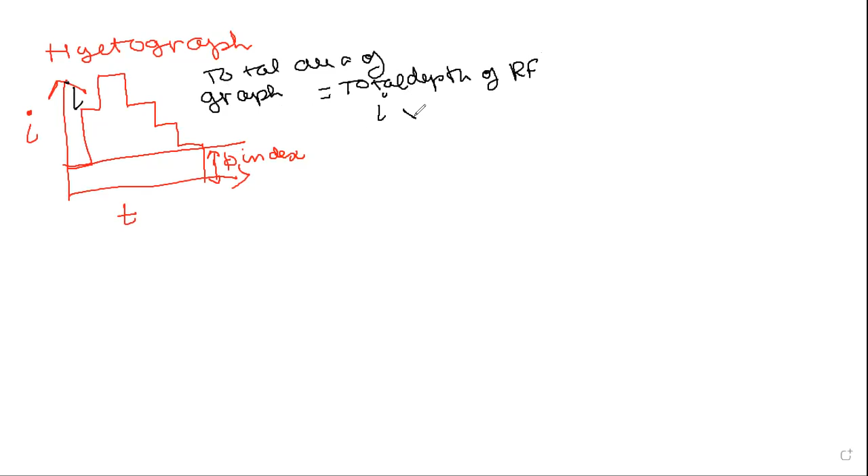In this graph, the total area of the graph gives the total depth of rainfall. The total area of the graph will be equal to the total depth of rainfall. So what does it mean? Area of the graph will be intensity into time, right? We know the unit of intensity is centimeter per hour, and the unit of duration is hour. We cancel, so at last we get centimeter. Based on that, we can calculate the total depth of rainfall.

So in this graph, we were talking about the phi index. The phi index gives the total amount of infiltrated water, the total amount of water that gets into the ground. The values above the phi index give an idea about the total volume of water contributing to surface runoff.

If you shade this region alone, it will give the total surface runoff. Therefore, the shaded area in this graph will give information about the depth of surface runoff. Okay, so in this we have to read about the runoff coefficient.

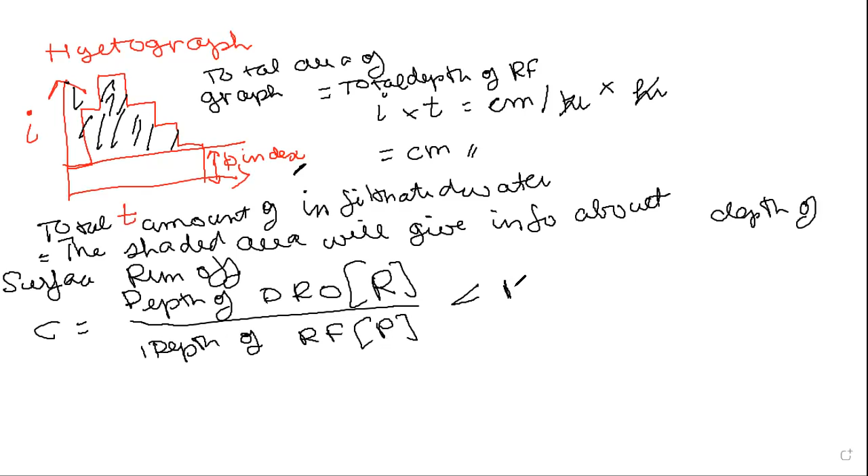So we can calculate discharge of runoff. Q runoff will be equal to C I A. This is the basic formula used for calculating discharge. Here discharge will be in meter cube per second. C has no units. For I, intensity of rainfall is centimeter per hour. For area A,

it is kilometer square. So if you change the formula for calculation purposes, Q is equal to CIA divided by 0.36. This is about the hyetograph. Next, we will be discussing the hydrograph. So what do you mean by hydrograph?

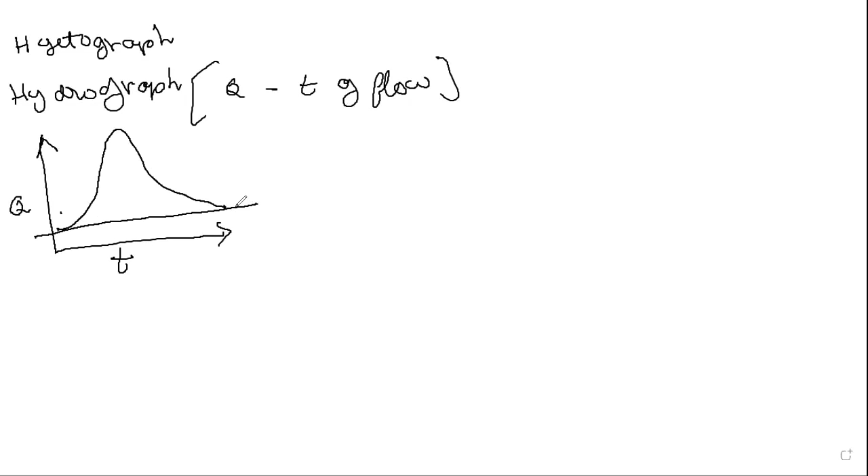It is a graph drawn between discharge versus time of flow. So how will the graph look? Discharge is on the y-axis and time of flow on the x-axis. This line indicates base flow. So it is a hydrograph drawn between discharge and time of flow.

In the hyetograph, the area of the graph gives total depth of rainfall. In this case, the area of the graph will give the volume of the direct runoff, DRO.

In the case of a unit hydrograph, we will be considering runoff depth as 1 centimeter. These are the points to be remembered. So here runoff is equal to half into time base into Q peak divided by area of the catchment.

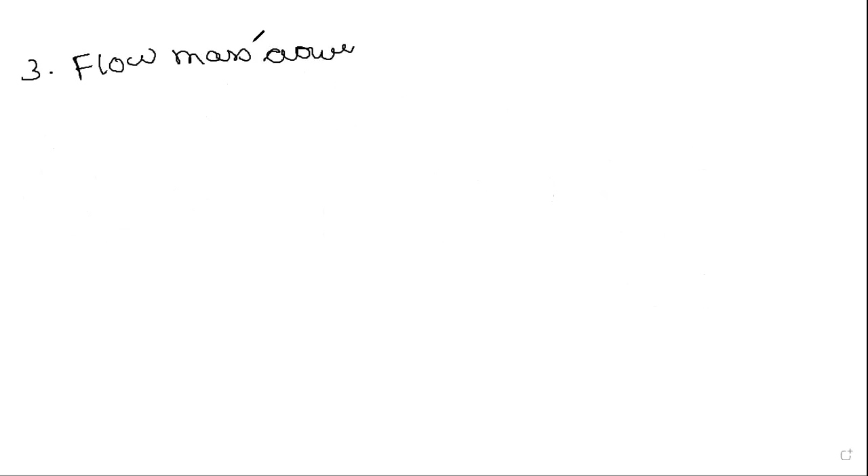The next graph we'll be discussing is the flow mass curve. This curve is also known as the Rippl curve. So how will this graph look?

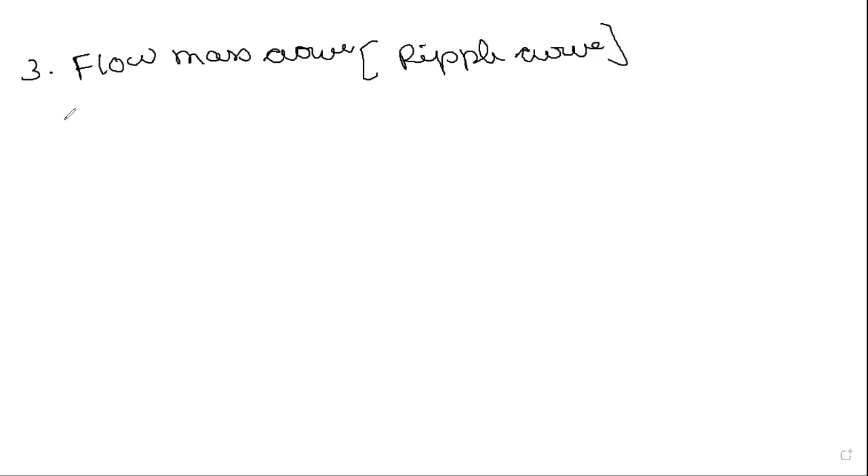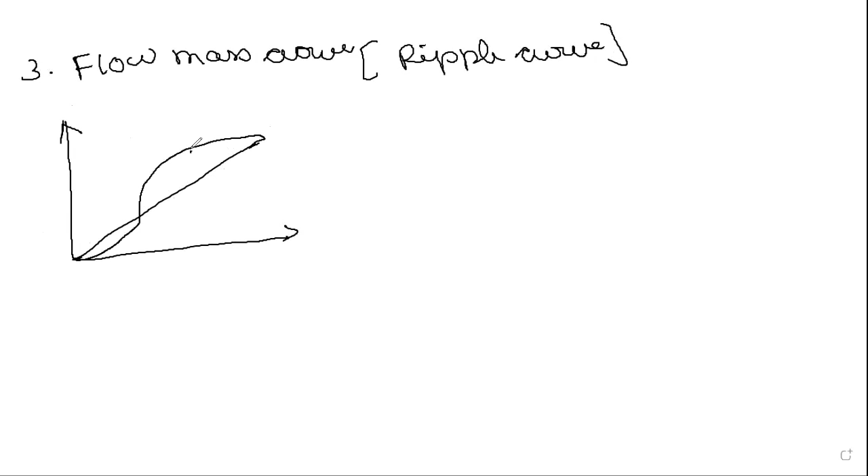Here the graph will be like this; this gap is denoted by y2 and y1. The y-axis denotes cumulative inflow, which is nothing but discharge into time. The x-axis gives information about time of flow.

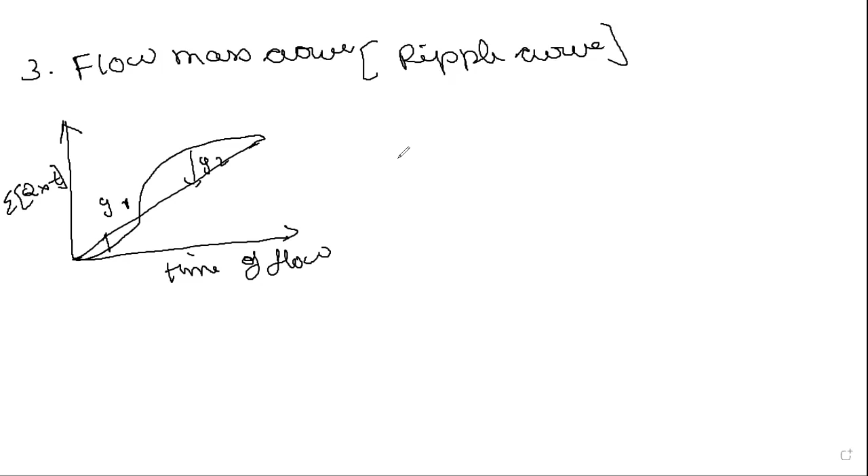So what do y1 and y2 indicate? They indicate the reservoir storage capacity, or live storage capacity of a reservoir. y1 plus y2 is equal to the live storage capacity of the reservoir.

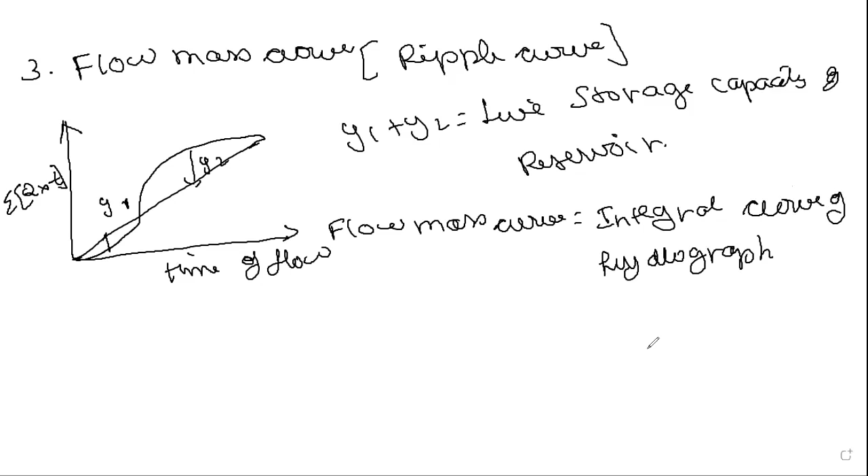Y1 plus Y2 indicates the live storage capacity of the reservoir. Flow mass curve is also known as the integral curve of hydrograph. So mass curve is also known as integral curve of hydrograph. So far we have three curves, three graphs: first is hyetograph, next is hydrograph, next is flow mass curve or Rippl curve. So next thing we will be discussing about

mass curve of rainfall. It is a graph drawn between cumulative depth of rainfall, that is summation P, in the y-axis, and time of rainfall in the x-axis. So this graph will be like this one. From this we can get dy/dx. Here tan theta, which is equal to dy/dx, is nothing but the intensity of the rainfall. This is an example of mass curve of rainfall.

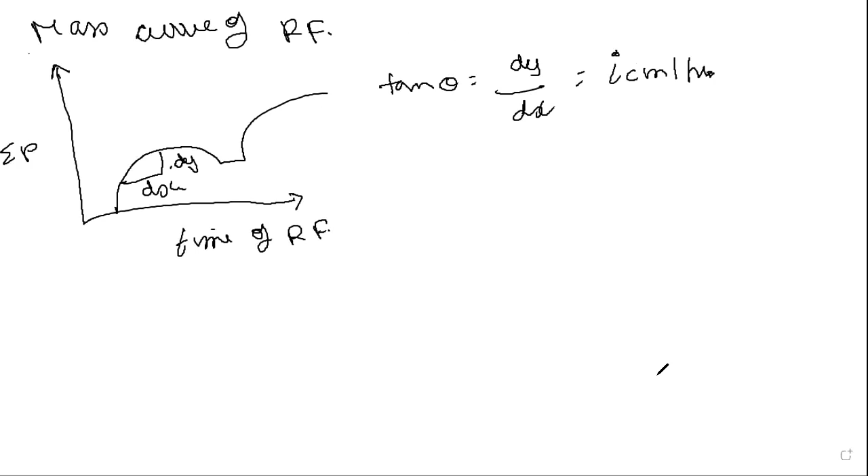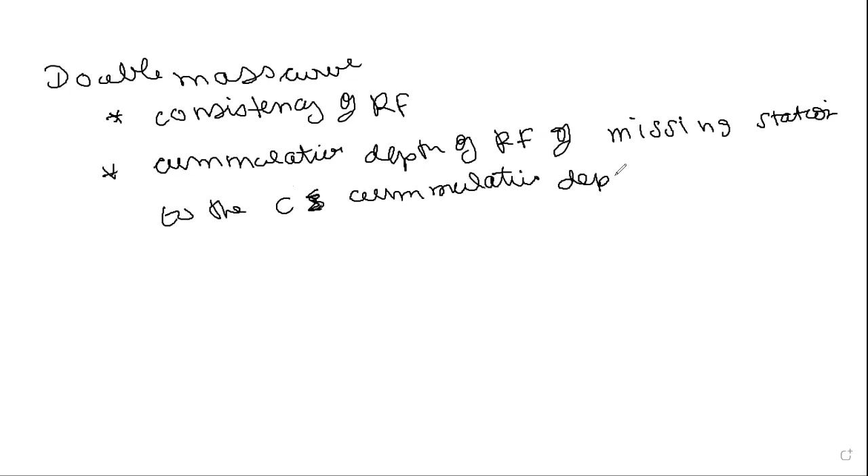Next thing we will be discussing is double mass curve. This is one of the important curves. It's similar to the mass curve, but with the help of this curve we can check two major parameters. One is consistency of rainfall, how consistent the rainfall is. Next one is cumulative depth of rainfall of the missing station to the cumulative depth of rainfall of the surrounding station. These are the two things we can determine with the help of the double mass curve.

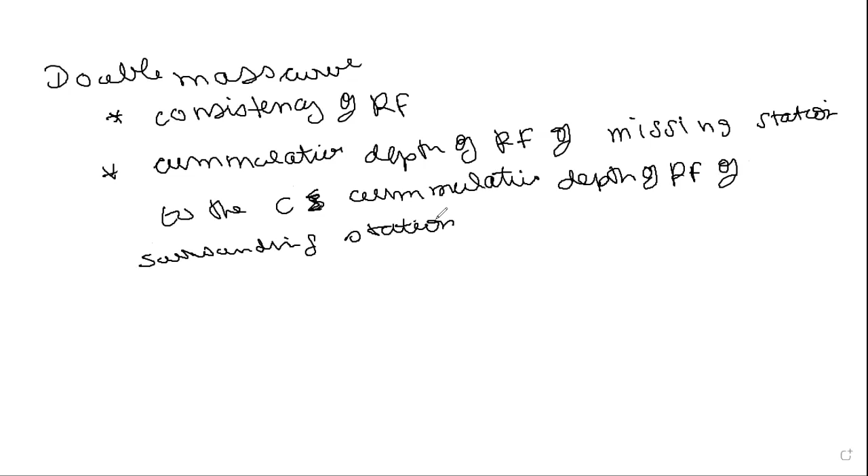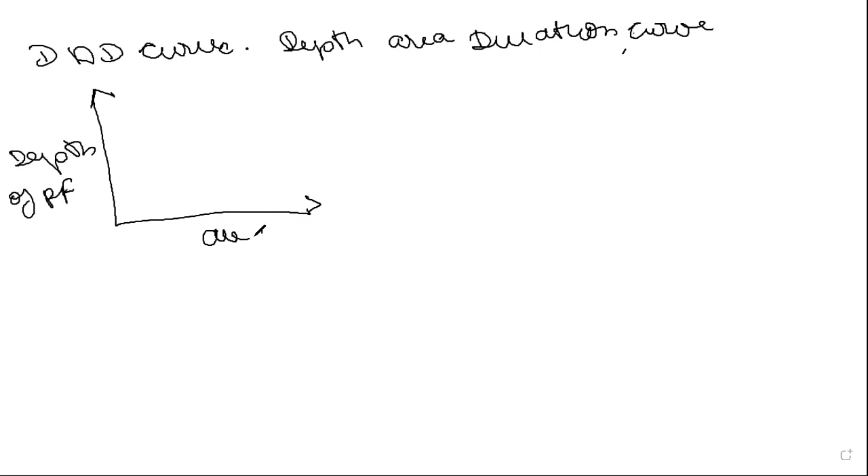Next, after double mass curve, we will be discussing the DAD curve. DAD curve is also known as depth area duration curve. In the DAD curve, depth of rainfall is in the y-axis, area in the x-axis, and duration is the parameter. So it will be like 25 hours, 15 hours, 10 hours. This is the depth area duration curve.

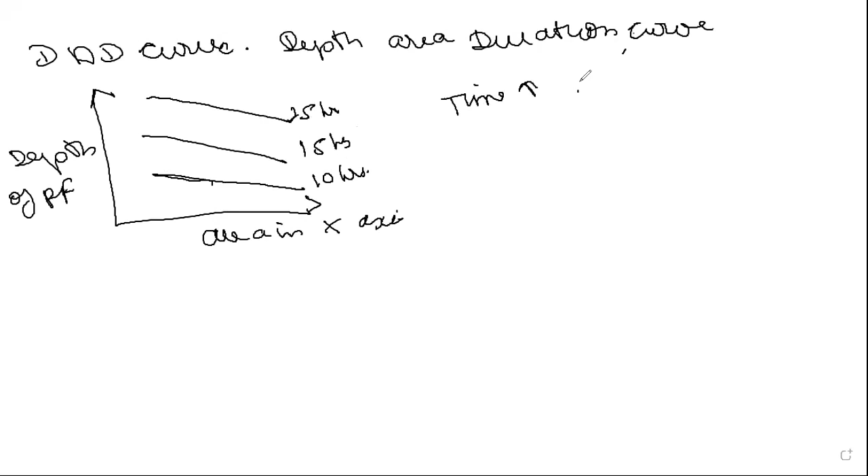With the help of this curve, whenever time increases, we can see that slope also increases. So time is directly proportional to slope. We can consider two scenarios. First, if time is constant, then area increases but depth decreases. Similarly, if area is constant, as depth increases, duration also changes. For example, keeping area constant at this point, if you look at the depth for each and every time, the depth keeps on increasing. So depth is directly proportional to duration. This is the depth area duration curve.

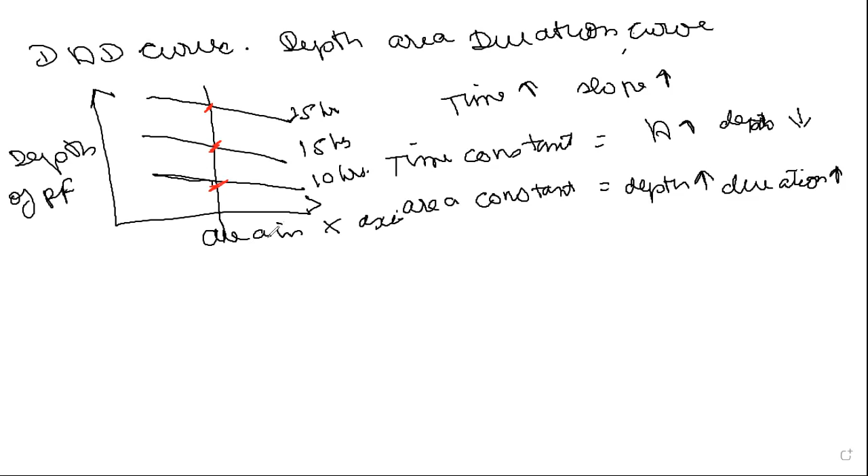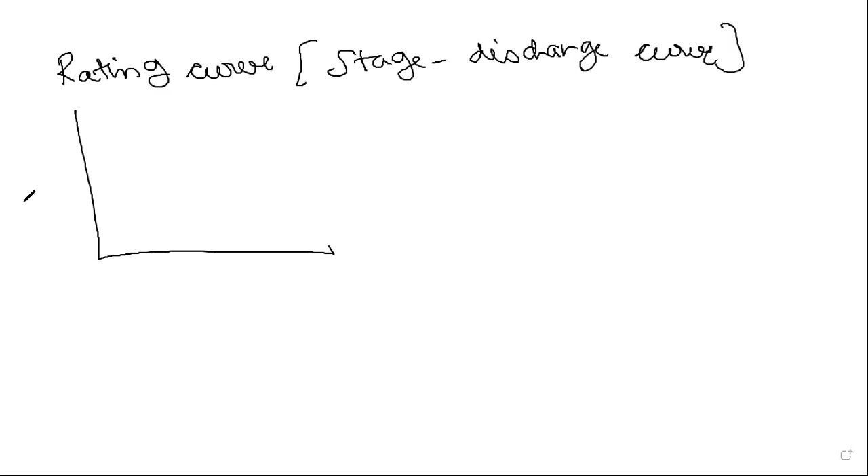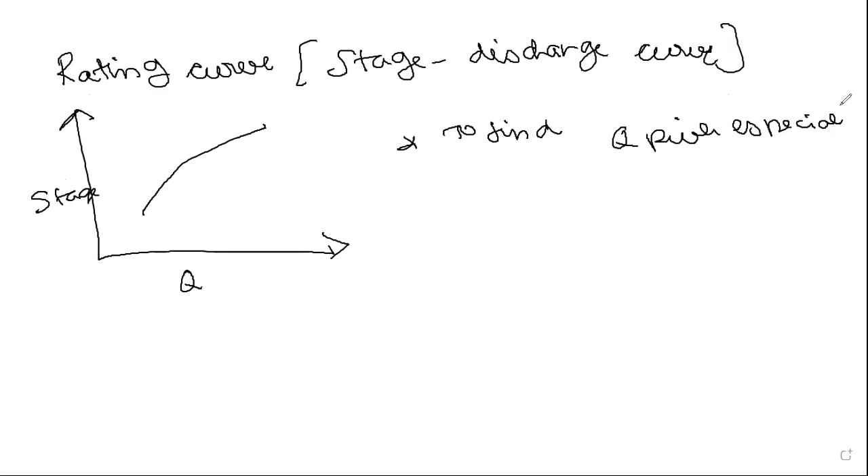Next thing we will be discussing is rating curve. Rating curve is also known as stage discharge curve. It is a graph drawn between stage in the y-axis and discharge in the x-axis. So this graph will be like this. The main purpose of this graph is to find discharge of the river, especially during flood time. It is also used to find depth of water in the river.

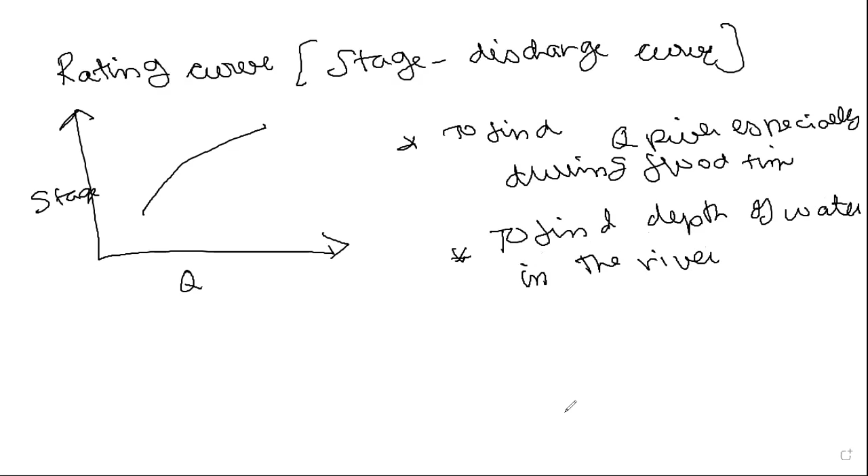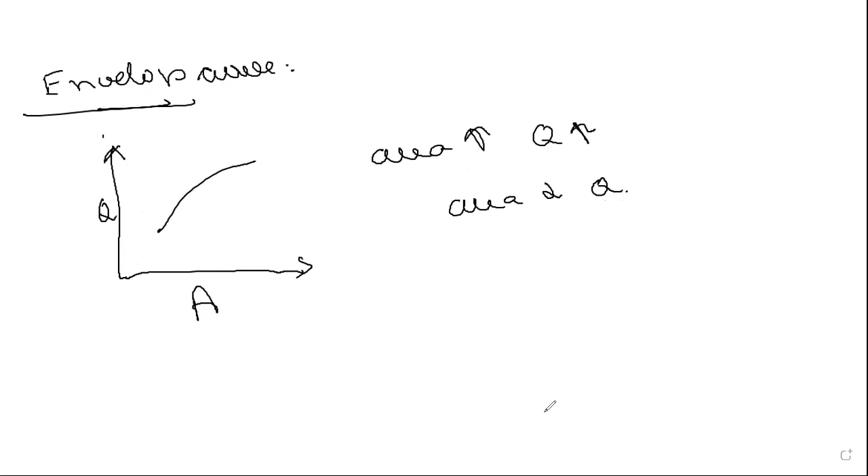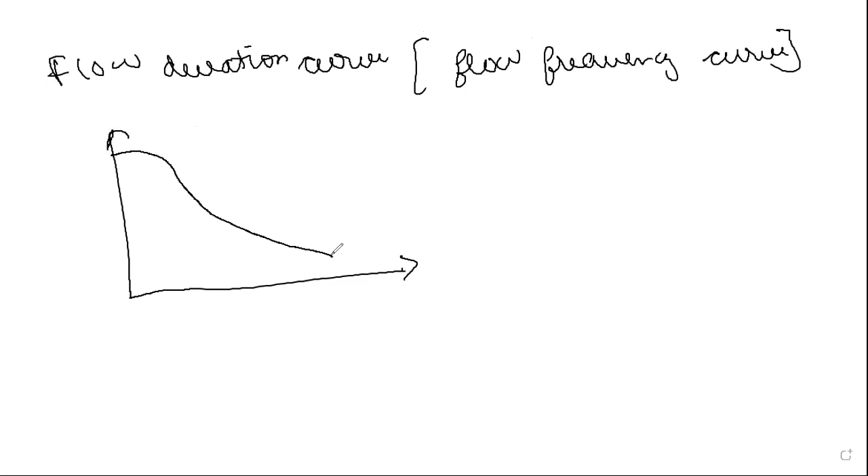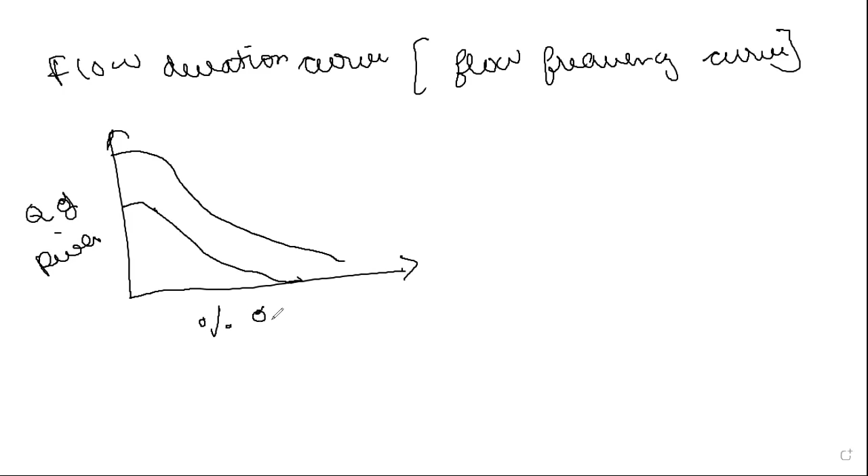Next is the last graph, flow duration curve. Flow duration curve is also known as flow frequency curve. This graph will look like this. In the y-axis we have discharge of the river, and in the x-axis percentage of time. Here it is 50 percent and 70 percent. This is discharge Q50, and this is discharge Q70. Based on the graph, the discharge at 50 percent is much greater than the discharge at 75 percent.

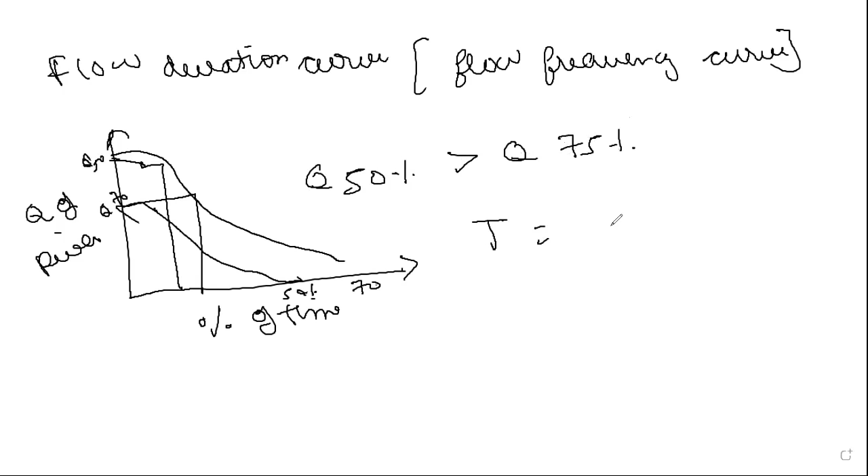A few things have to be noted, like return period. Return period T is equal to (n + 1)/m, and the probability P is equal to 1/T, that is m/(n + 1), where m is the rank of flood discharge and n is the number of years of record. These are the important graphs which we will be following in hydrology.

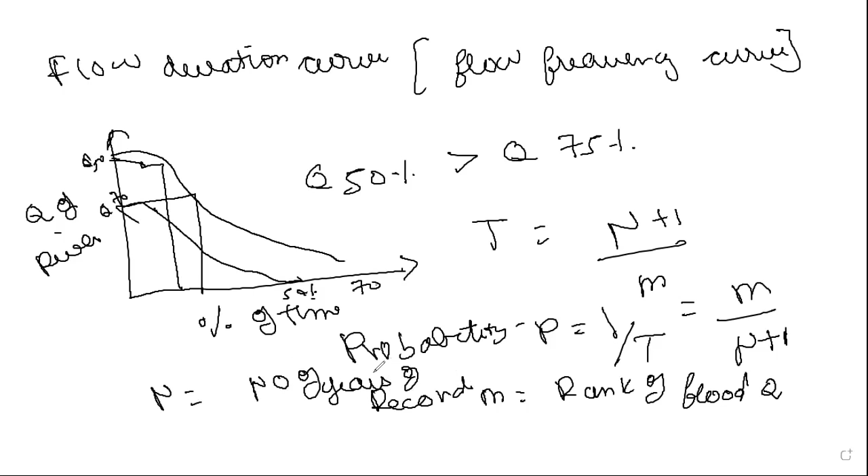Next class we will be discussing about rain gauges and calculating the optimum number of rain gauges.